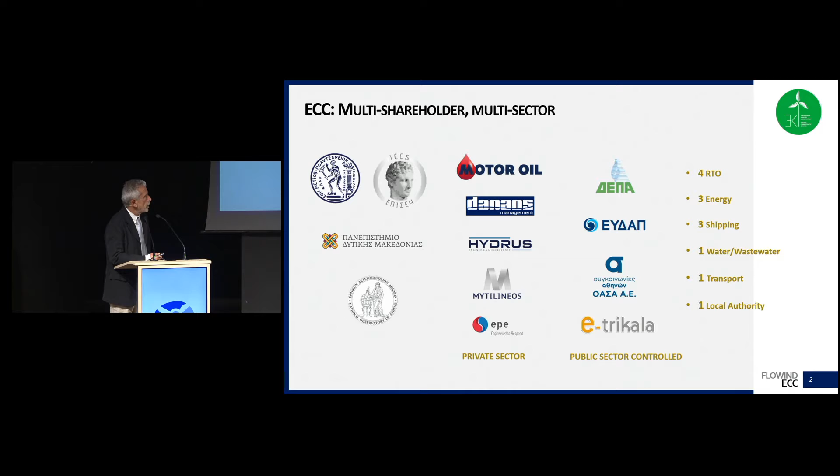On this slide, you see the partners of this Energy Competence Center, and I'm going to start saying a few words about FLOWIND. FLOWIND, as I said, is one of the center's projects, and it focuses on offshore wind energy, and particularly on floating systems.

In this project, partners, which are also partners of the center, are Hydrus Engineering from the private sector with experience in maritime engineering, the National Observatory of Athens, which we all know, which has to do with the wind and wave climate, the University of Western Macedonia and the National Technical University of Athens from the academia. Now, this project was partially funded by the General Secretariat of Research and Innovation.

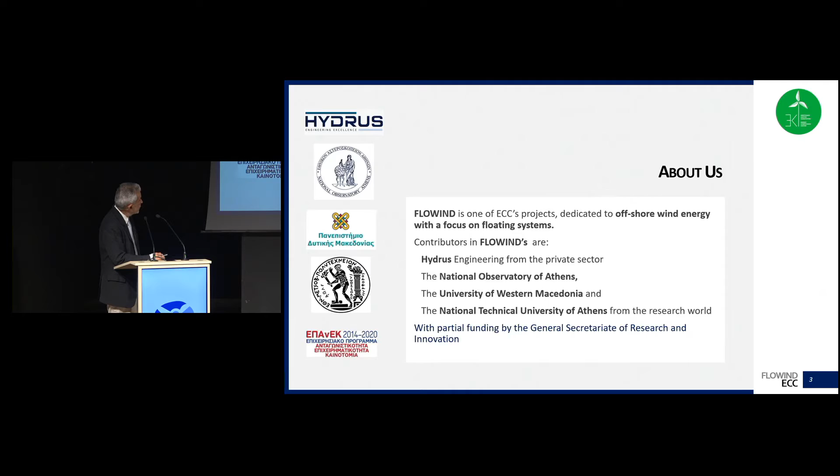In the next slide, I'm going to show you the big picture of what we're doing. In few words, what we try to do is to bring up a bundle of services or solutions based on our research expertise and our long-lasting know-how built up through research and development projects funded either in a national or in a European context.

What you see here are the four pillars on which we expand our services and solutions. The first is the wind and wave, the resource, clearly, it's number one, where we are providing the information at a very high resolution level, both regarding the meteorological aspect and the micrositing, which has to do with any effect the nearby topography may provide.

Then we have the wind park design, where we aim at having the minimum LCOE, and this has to do with the layout of the park, the cabling, noise, and also the operation control for minimum wake shading, which is one of the things that may affect the operation of a wind farm. Then the finance, and not only, together with socioeconomic analysis. And the last pillar is detailed engineering, which goes through all of the stages that are needed in order to come up with a well-defined wind turbine system.

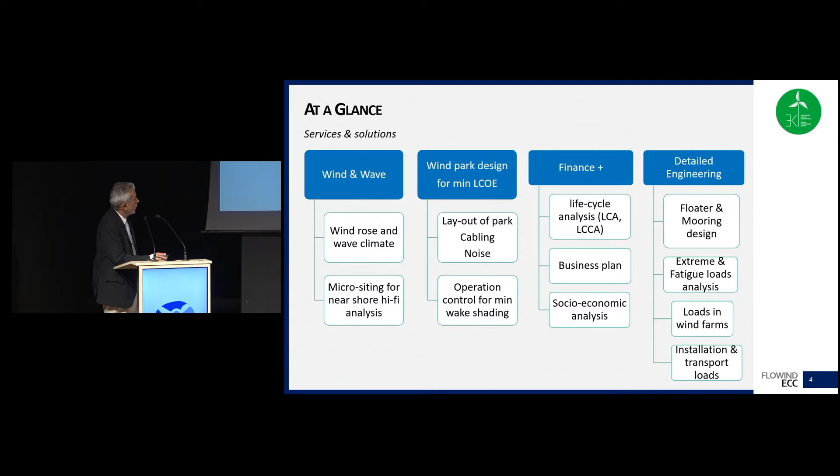In the next few slides, I have selected three topics, which give you some of the highlights of what we're doing. The first has to do with the redesign of the Horns Rev 1 wind park, where we aimed at lowering the LCOE and where we applied all of the software and the computations that we have developed and we have integrated in this bundle of services.

The second has to do with the floater design tool, and it's related to the benchmarking in extreme wave conditions. The third has to do with the formulation, the application of high-fidelity aeroelastic modeling beyond the state of the art, where we are applying large eddy simulations, CFD simulations, together with the aeroelastic behavior of the wind turbines. Let's start with the first one.

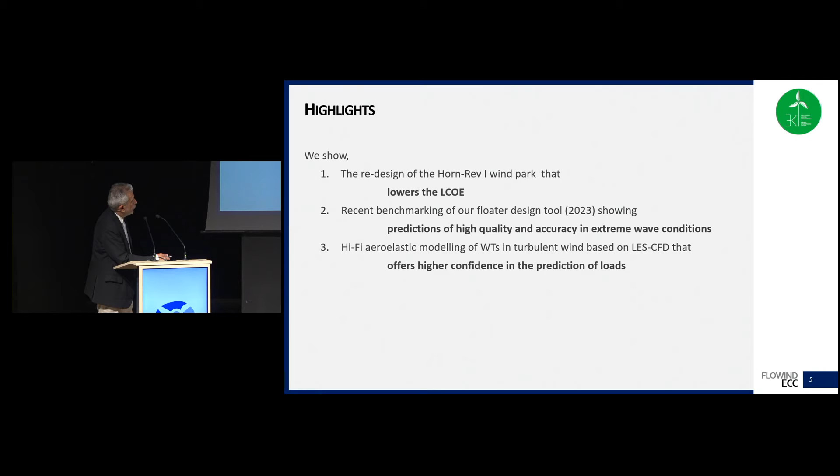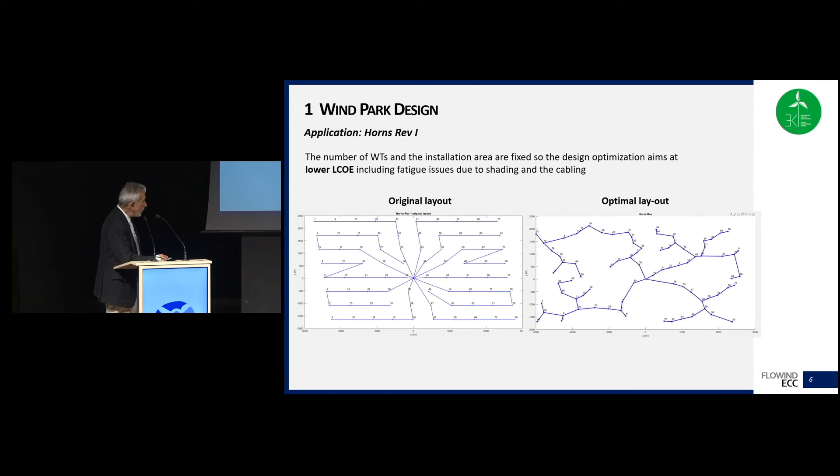What you see on this slide is the original layout of the Horns Rev Park, and on the right-hand side, you see the optimal layout that we came up with. The positioning of the turbines is different, and also the cabling connections. What we achieved is shown here, in the last column, where with arrows we show the benefits. You see that without making any modifications other than design modifications, we were able to decrease the LCOE and, what is of importance here, we have reduced by a considerable amount the cable cost as a percent of the capex.

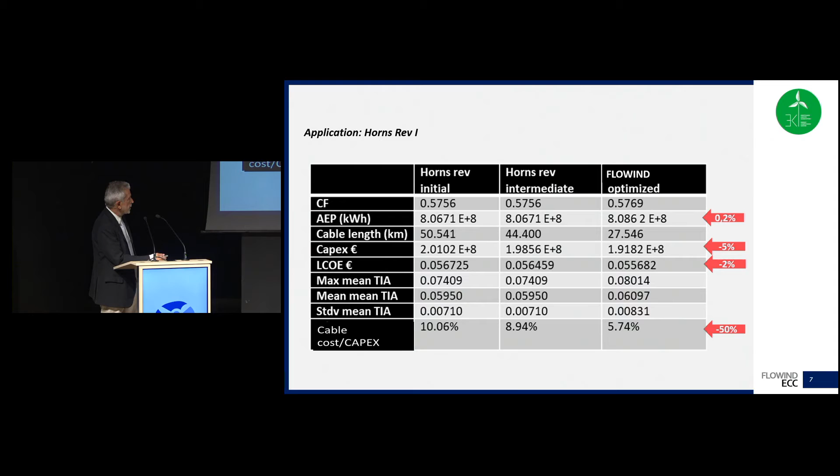The second highlight has to do, as I said, with the floater design. What you see here on the right is the floater of the 15 megawatt IEA wind turbine, which was tested in the wave tank in Plymouth, and defined a blind benchmarking in which 15 participants from all over the world sent results, and the comparison will be published, I believe, in the next months.

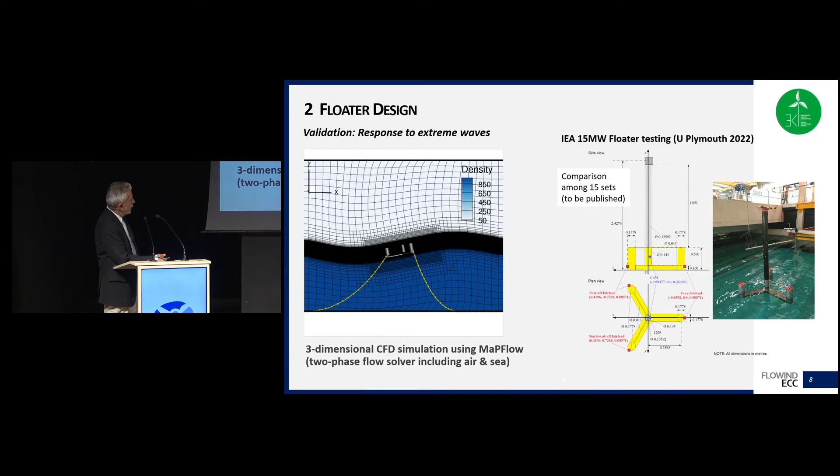On the left-hand side, you see a snapshot of the simulation, where you see the floater in the middle with the mooring lines and the free surface of the simulation. In this benchmarking, we have used three-dimensional CFD using our home-developed software, MaPFlow, which is a two-phase flow solver, including air and sea at the same time.

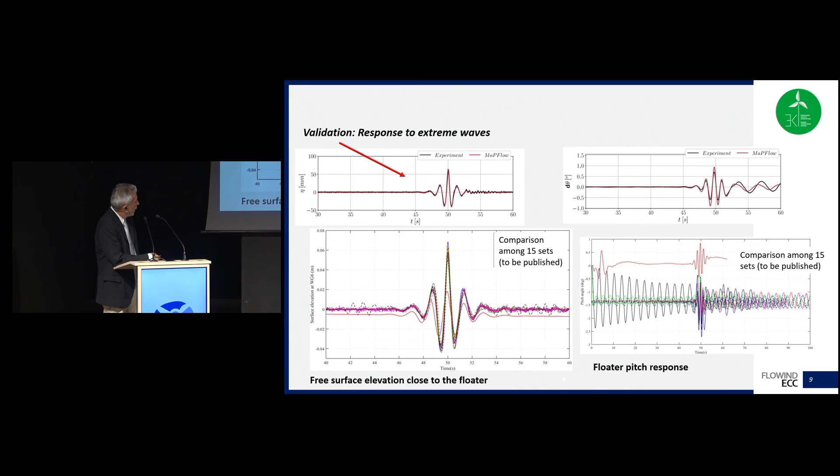The third highlight has to do with what I already mentioned, high fidelity modeling, which has to do with the safety of wind turbines, and it goes beyond the state of the art in the following sense. Normally, wind turbines are calculated in turbulent winds, where the turbulent inflow is assumed to be frozen, and so it doesn't interact with the wind turbine. Of course, it has an impact on the behavior of the wind turbine, but not the other way around. Here, both the turbulence and the wind turbine are in one single simulation, and the wind turbine is considered as being a deformable body, so it is a fully aeroelastic simulation.

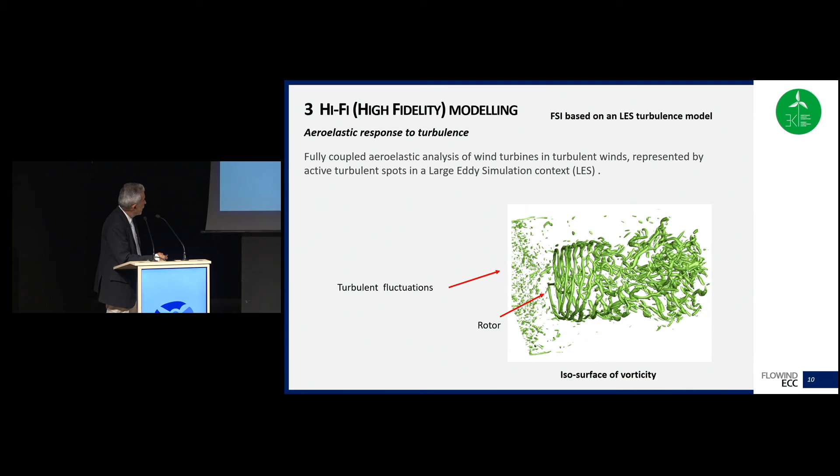What you see here is the vorticity shed by the rotor, and in front of the rotor you can see the incoming turbulent fluctuations. The modeling context for this kind of simulation is large eddy simulation modeling, which is considered today the most advanced worldwide. The benefit of using such modeling is that you can provide better prediction of the loads, and therefore you can allow a better design, and by that a reduced LCOE.

What we see here is a comparison of the fatigue loads. The left-hand side has to do with the spectrum, and the right-hand side has to do with the ranges and the number of cycles that appear in the simulation. Of the two simulations you see, the AL is the one with the LES modeling, and the other one is the standard blade element momentum simulation. And you see that there is a difference which can be seen in one number here, in what we call damage equivalent load, where the one with the LES is 43 and the other one is 49. All of the results have to do with the flap-wise bending moment of the blades.

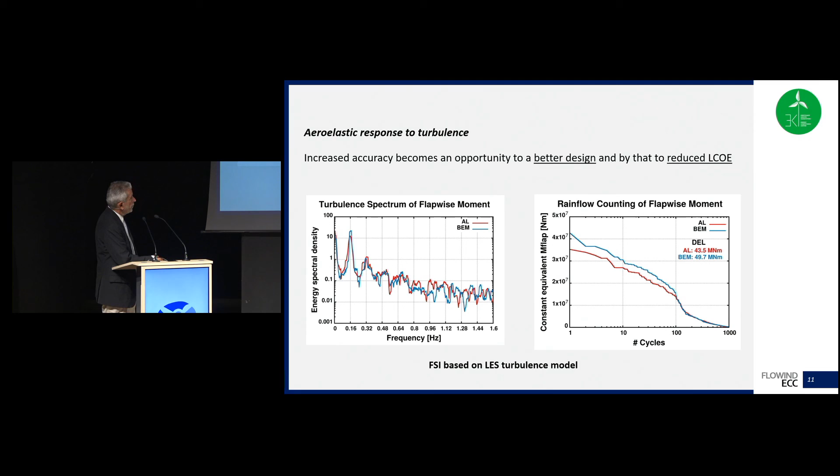So, having presented the three highlights, I've come to our message for Offshore Wind and from the Energy Competence Center. We combine our broad engineering knowledge in wind energy and maritime technologies that we inherit from the National Technical University of Athens, from the universities and the research centers. We have long research expertise at European and national level. We have conducted 2 floating wind turbine research projects, and we can build on that. And third, validated high-fidelity computational tools and procedures beyond the state of the art.

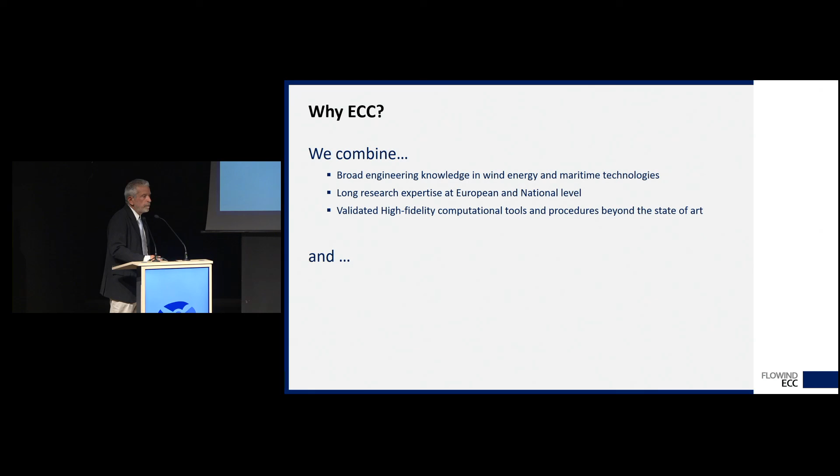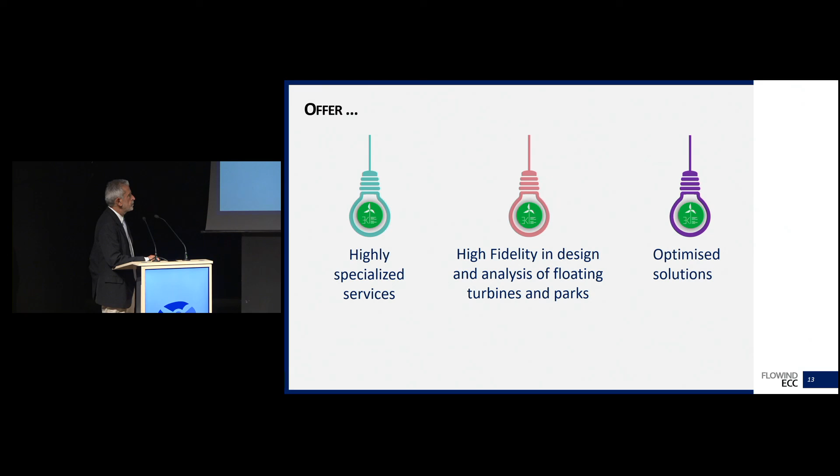And we offer highly specialized services, high fidelity in design and analysis of floating turbines and parks, and optimized solutions based on our long-lasting research expertise. Thank you very much.